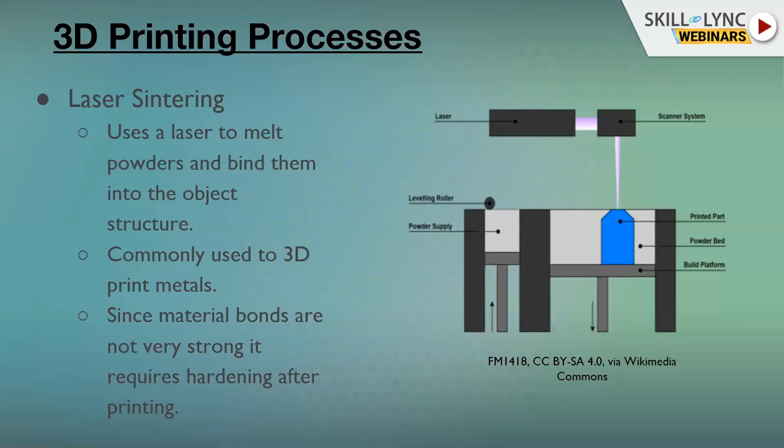Now again, coming back to Inkjet. Inkjet is very interesting because it has its origins in inkjet printing, the printer we use at home. So you'll be wondering how do you use a printer that we use at home for producing a 3D object? There are two ways of doing that. One is material jetting, like we discussed before—you just jet the material out and keep producing layers and layers and layers.

So instead of using an extruder, the end effector that actually supplies material to be formed into layers is an inkjet head, also known as a print head, and it keeps printing each layer using an inkjet. This is not exactly a technology I've seen commonly used, but it's still part of the 3D printing process.

Binder jetting, on the other hand, is extremely common and a very good technology for 3D printing. A lot of the high-end products in the market with good surface finish, product quality, and strength are usually done using binder jetting. If you look at this image and recall the slide from before, it looks pretty similar.

The difference comes here: instead of a laser, a binder jet has an inkjet print head, but instead of depositing ink, it deposits something known as a binder, which is more like an adhesive. So every layer, instead of melting to bond the particles together, it sprays on this adhesive, binding the object together into parts. This adhesive binds all the particles of the powder to form the object.

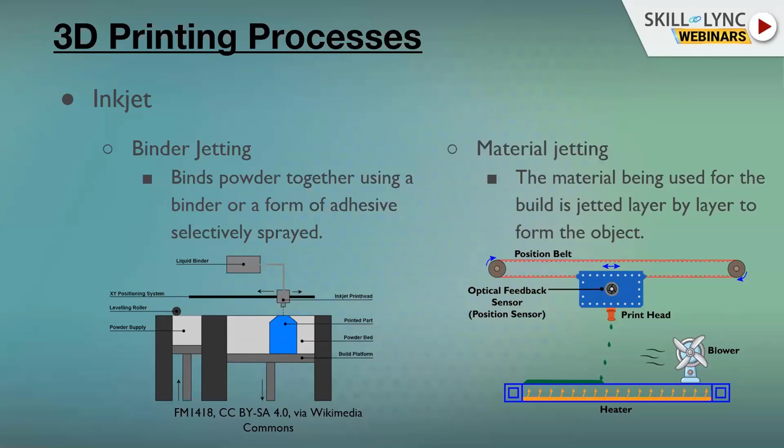Besides that, inkjet has seen very significant success. HP and a lot of other companies that originally produced inkjet and laser printers are now looking into using the same technology to produce 3D objects and 3D printing. So you could potentially buy an HP 3D printer—I don't know if they're out yet, but you could potentially buy them soon enough.

Okay, next—this is the most commonly used method of 3D printing. It's called fused deposition modeling. Every 3D printer that people have at home, in colleges, or in manufacturing that you've seen is probably made using fused deposition modeling, about 90% of the market.

One reason is that FDM printers are super cheap—sorry, super expensive, my bad, they are super cheap. The material required in FDM is very cheap, and everything involved in handling and keeping that material clean is also very cheap, which makes it very easy for hobbyists and people who want to try this technology at home. An FDM 3D printer for a hobbyist would be very cheap compared to any other form of 3D printing.

So what this technology does: there is a build platform and an extruder. If you don't know what an extruder is, it's basically a heated metal piece with a hole in it. The filament passes through it, and when it reaches the end of the extruder nozzle, it gets melted into liquid form.

So what an FDM printer does is start from the bottom, depositing a layer of melted thermoplastic, then building layers on top of it over time. The build platform stays in place and the extruder moves. On the contrary, there are also printers where the extruder stays in place and the build platform moves up or down.

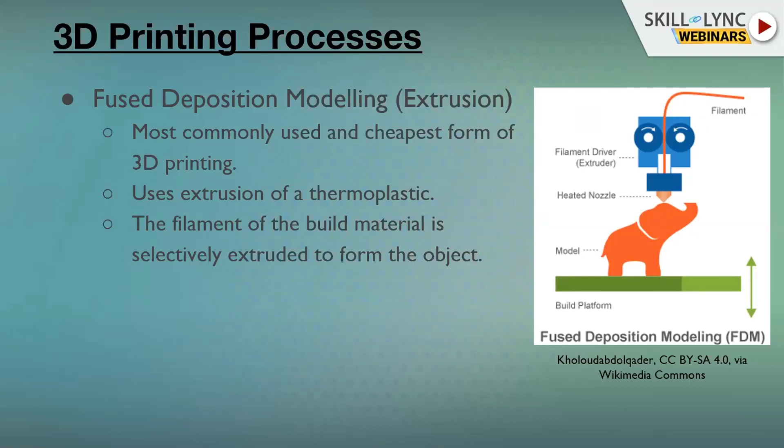So these are the commonly used processes that we know very commonly. FDM is one of them, and it's the most commonly used. Next, we'll go to how we would select a process. I have listed all the processes here. This is not an exhaustive list, but if you wanted to pick a process to produce something, what process would you use? There are certain criteria on the basis of which you would select a process.

Processes vary on build material. Processes that print metals cannot produce plastic parts, and vice versa. So that's where you want to keep in mind what material you're using. If you want to print in metal, you're limited by certain processes, and if you want to print in plastics, you're limited by certain processes. That's something you want to keep in mind.

Next is object strength. All processes vary, and the object strength would vary from process to process depending on what object you want to produce. The surface finish also varies by process, and you'll get different results for the final product. Processes also vary in speed - certain processes are faster than others, and that's something you want to take into account.

Product geometries are also very important - what kind of geometries would best suit a certain process. Cost varies from process to process, like I discussed before. FDM is very economic, but it cannot produce certain geometries, or it cannot print every material that you want. So you want to take into account all these aspects and the product you want to produce, and then think about what process you want to go for.

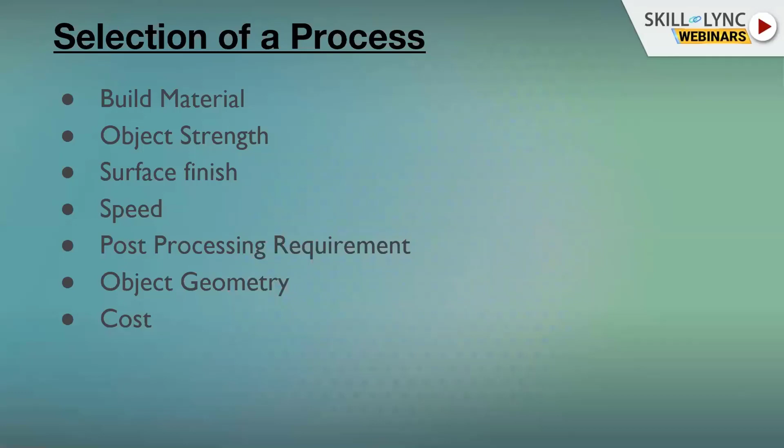Sorry, my mouse is a little more sensitive.

So coming back to what materials 3D printing can produce - at the moment, in plastics, the most commonly used are PLA and ABS. PLA is polylactic acid, and these are the most commonly used materials in FDM. That's mostly because they work well in the environmental conditions we have, but there's no limitation to what materials you can use with FDM. A lot of materials can be used other than these, but these just work well and are easy to handle - there aren't a lot of challenges that come up when trying to print them.

We discussed photopolymers and liquid resins in a very specific process. Then metals - aluminum, steel, stainless steel, any metal you can think of can potentially be 3D printed, though it's limited by the processes and technology right now. We also discussed food, and another important one is ceramics - a lot of hobbyists and artists have been able to produce a lot of things with 3D printed ceramics. Basically, any material can potentially be 3D printed.

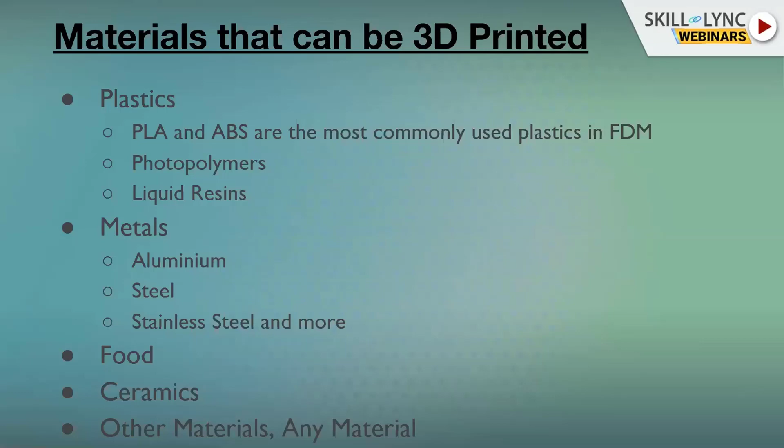Okay, moving forward. I know I'm running out of time, but let's wrap it up soon enough. So we'll just quickly talk about the steps involved in 3D printing.

I'll talk about the 3D printer I have, which is an FDM, Fused Deposition Modeling 3D printer. I have a Creality CR10 V2. I'm not associated with this company in any way; it's just the name I wanted to put out to give you an idea of what it looks like.

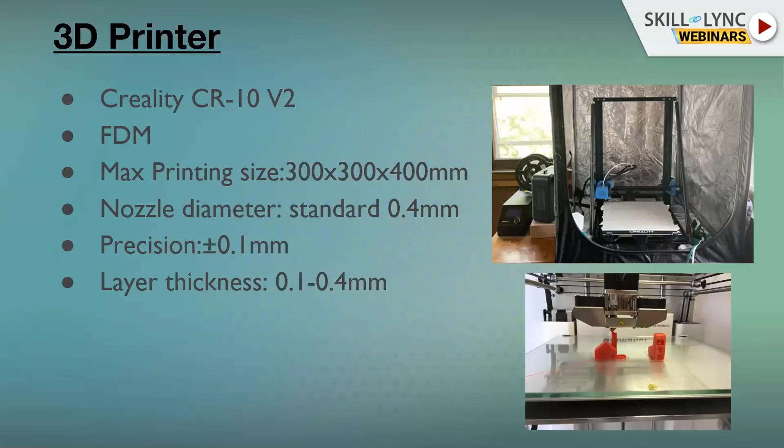So you'd start with a CAD model, and when saving the file for this geometry, you'd save it as an STL file. This converts it into the STL format, which we discussed before, standing for stereolithography - a very specific format that's very helpful when used with slicing software.

There's something known as slicing software. What this does is pick up the geometry of the object produced in the CAD model and slice it - as we discussed, a slice is basically every individual layer that the 3D printer is going to print. Now, a 3D printer cannot read STL files, CAD files, or anything like that.

What it needs is the G-code. The G-code tells the printer how it's supposed to move in order to produce a 3D printed object, and while doing that, how much material it should be extruding at that point, when the fan or heater should be on, and what the bed temperature should be during that time.

So what the slicing software would do is pick up this STL file, convert it into a G code, which is basically a file that the 3D printer can understand and thereby produce the physical object from the digital design. So in the 3D printer, you would load the G code, which we received from the slicing software.

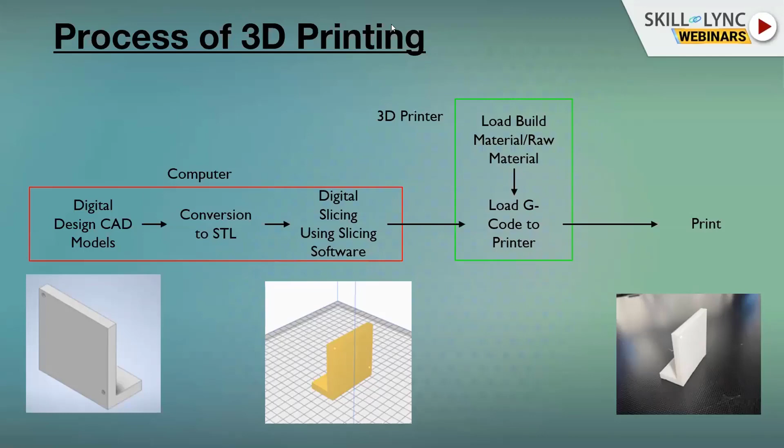So basically, I can use this for anything and everything, and it's been very useful for me, especially in the field I'm working with. But the opportunities in this field are limitless. I hope you have a good understanding of how simple this is, but if you have any questions, please feel free to ask.

Okay, some important parameters while slicing. So we discussed the slicing software. I'm going to quickly go through them because I'm kind of running out of time. Quality is something you define in a slicing software, which would define how well the print looks and how good the resolution of the print is.

Next is the shell. Most 3D printed objects are assumed to be hollow, but if they're hollow, you need to define the thickness of the outer wall. That's very important—it would define the strength of this object.

Now, it starts as hollow, but you can define the amount of infill the material is printed with. You can go from a completely hollow object at 0% infill to 100% infill, which would be an object that's not hollow at all—it's filled with material and super heavy. On the other hand, you can select mid ranges like 60%, 70% infill, which gives something in between, but not completely solid.

You need to adjust material settings if you're changing the build material on the same printer. That would adjust a lot of the temperature settings when you're printing.

There's support—some geometries may need support structures. A lot of geometries have something known as an overhang, and that needs support structure. Now, these things I'm talking about are very specific to FDM; they do not apply to a lot of the other processes.

Build plate adhesion is another setting. A lot of times there's a problem known as warping, which we'll quickly discuss next. You would need something known as build plate adhesion, which you need to define when using the slicing software.

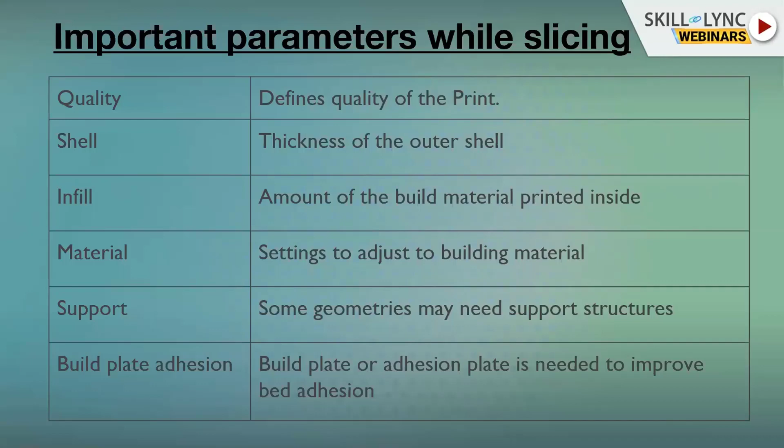Okay, so now that we've spoken about FDM, a lot of you might think of buying an FDM printer and start printing. You might face issues that happen very commonly. I just want to let you know, don't be deterred by them—they're very easily solvable, but these happen all the time.

Some of the issues you'd realize when working with FDM are warping, cracking, layer shifting, Z wobble, stringing, curling, and something known as elephant's foot. Whenever you're working in manufacturing or industries that use this technology, these are words that might come up from time to time. They're basically issues that happen with FDM, which are easily solvable. If you're a beginner and novice to this technology, don't feel deterred by it—it's very easy to solve these issues.

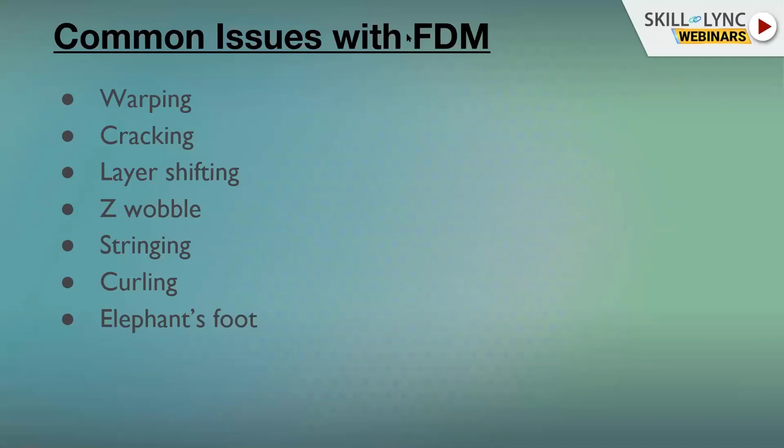So warping. If you remember what we've discussed, you'll recall that 3D printing uses a layering approach. You're basically 3D printing with a thermoplastic, which is a solid. As we all know, solids expand on heating and contract on cooling.

When you're using a layered approach, the lower layers are heated first and printed, then the upper layers. By the time the upper layers are being printed, the lower layers cool down. Because of that, the lower layers start to contract while the upper layers are still in their expanding stage.

What this causes is that the contracted layers lose contact with the build plate because of their contraction, while the upper layers are still expanding. In FDM, it's very important that the lowest layer, which is in contact with the build plate, holds all the layers above it. So it's critical that this process of warping does not happen.

This problem is called warping and happens very commonly with FDM. It usually doesn't happen because most of the time build plates are heated, so that the lower layers are kept heated even while the upper layer is being printed. That's very helpful in 3D printing with FDM, but this issue is still very common and happens all the time.

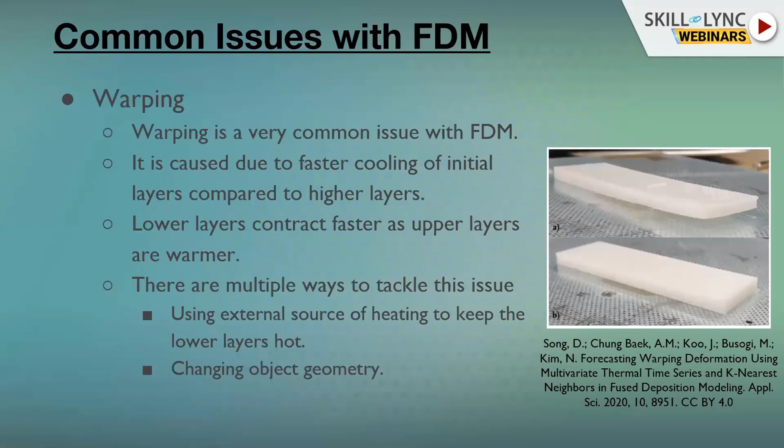Next is cracking. This doesn't happen as much, but I have seen it from time to time. What happens is that when a layer is being printed on top of another layer, the layer above basically solidifies even before it can bond with the lower layer. Because of that, the bond between two layers becomes very weak.

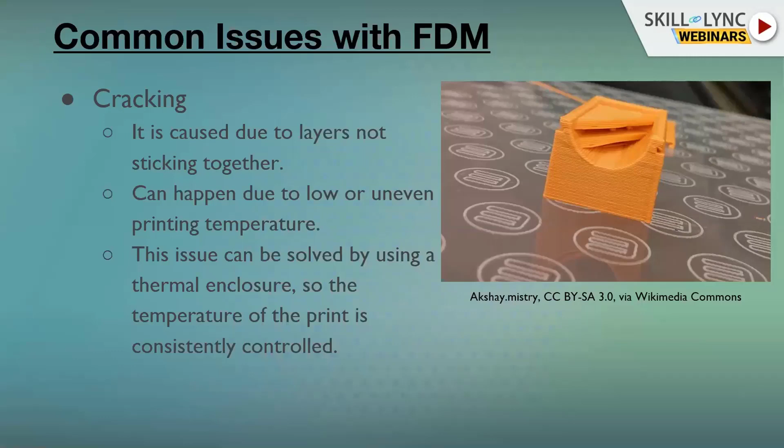Even though the object is printed and looks fine, it will basically just fall apart when you put any stress on it. This is a problem that rarely happens, but if it does, it can be controlled by using a temperature-controlled enclosure, and by making sure your temperatures are set correctly so the object isn't solidifying before the next layer is printed on top. This is something you'll control during the slicing process.

This issue happens pretty commonly, but it's not that bad. In terms of object impact, it only affects us aesthetically, but as a product it isn't affected so much. It's called stringing.

Stringing happens when the temperature of your extruder is higher than it needs to be—even if it's just slightly higher, or if the environment is very hot on a particular day. What happens is the opposite of what we saw with cracking: instead of the layer solidifying too fast, in this problem it does not solidify in time for the extruder to move to the next layer.

It prints one layer correctly, but because the material is still hot and not solidified, it sticks to the extruder. As the extruder moves to the next layer or part of the geometry, it drags the thermoplastic. Since plastics stretch a lot, instead of staying stuck to the object's geometry, it gets stuck to the extruder.

This produces these strings. Again, it's not a big problem—it can be solved with good temperature control. Even if it does happen, it can just be cleaned off by post-processing with an abrasive like sandpaper. But it's much easier to get good temperature control and produce the object correctly the first time.